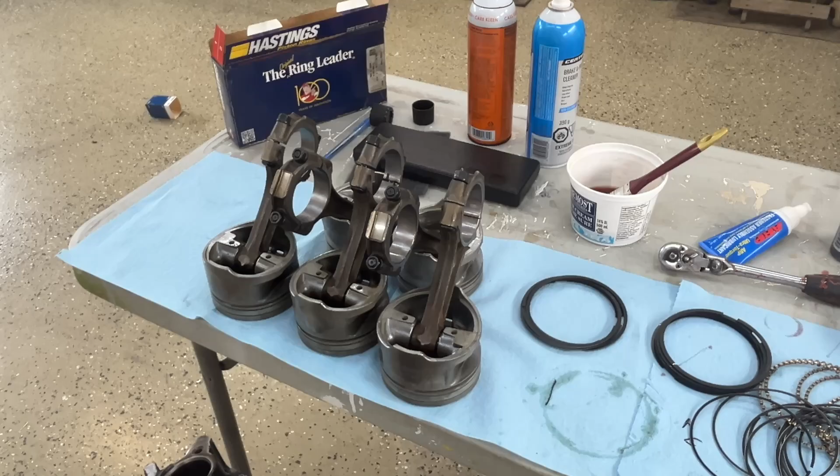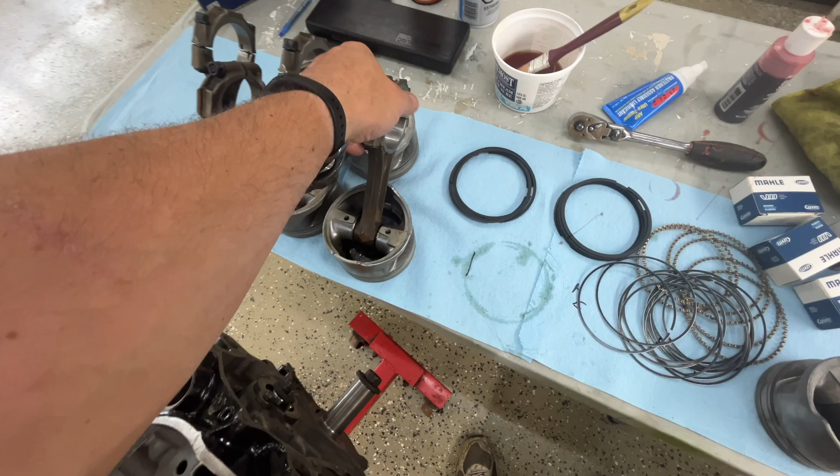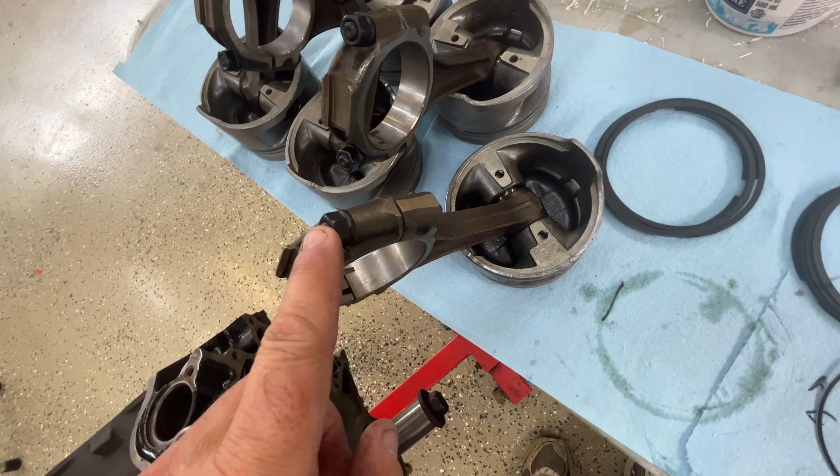So here's an update on what's happening with my engine assembly on my 5-liter Stalker project. So I have 2 pistons in. I have 1 and 5 already in. And just a little overview of what's happening. So these again are factory pistons that have been checked and cleaned up. We've got stock Ford rods, stock original Ford pistons. ARP rod bolts being added because these are a weak spot in 5-liter Fords.

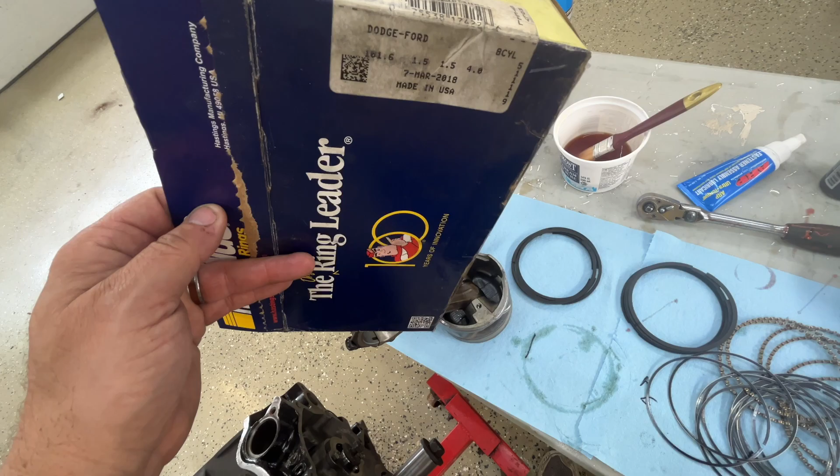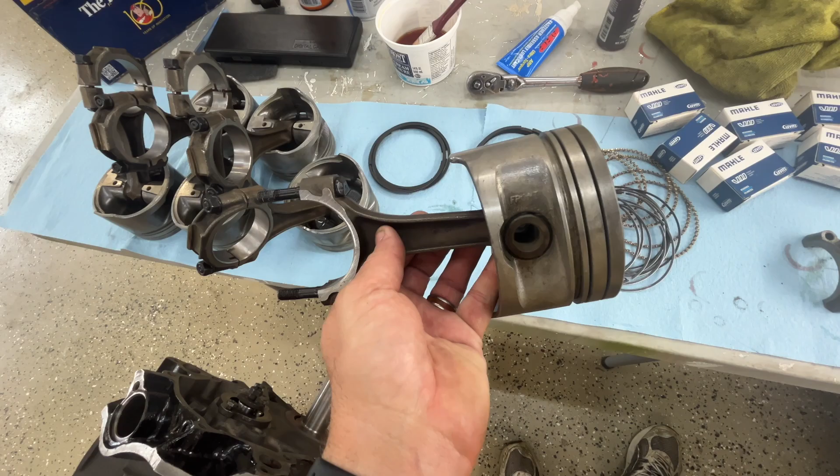My rings, upon recommendation from my machinist, are Hastings. These are a moly coated top ring, and they are standard tension for the 5 liters, which the roller motors are a lower tension to begin with. So I've got my top rings, my second rings, my oil control rings all set out. And then I'm just going through the process of slowly assembling this. There's a process, of course, you need to follow for all of this. There's lots of videos on YouTube and many books written about it.

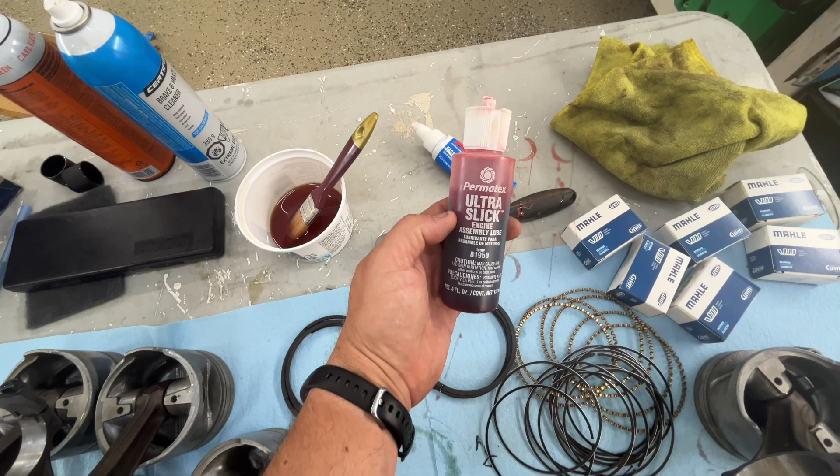With ARP rod bolts, you have to use their assembly lube. I'm using Ultra Slick for the bearings, Permatex. And this I'm using for cylinders and for lubricating the piston wall. People do different things. That's actually 30 weight oil, about a quarter Ultra Slick, and then I've got a tablespoon of Marvel Mystery Oil in there, which I use with kind of everything I do. I've had really good luck with it. So anyway, that's the process.

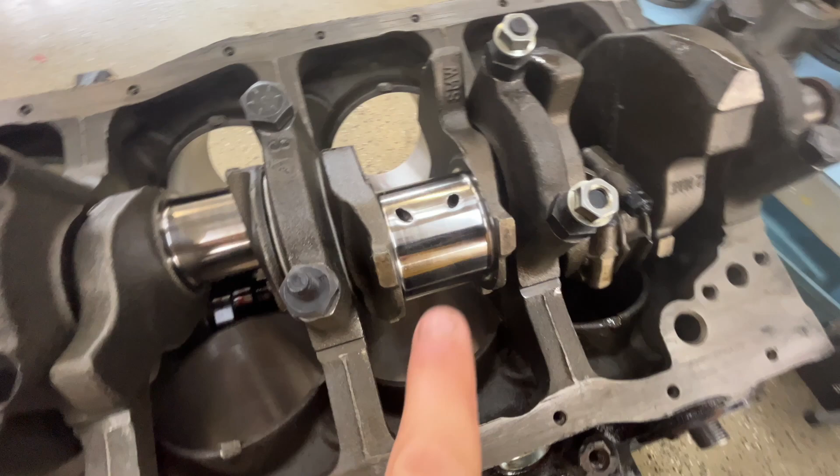So we'll get these installed, flip it over, give you a little look underneath here at the crank I put in yesterday. And a couple things to notice on it. You can notice that the oil holes are chamfered a little bit, just to allow a little increased amount of flow there. He did a beautiful job at the machine shop polishing this up. It's just butter smooth, and it just turns butter smooth. He did a little align bore, just touched it, and wow, did it ever make a great difference.

So put in the mains and put in the moly bearings. And everything's exactly in spec where it should be in terms of thrust. I think it was 5 thou, which should be 4 to 8. The main bearing clearances were perfect, right where they need to be. And I checked 3 rods, 1 here, 1 in the middle and the end, and they're all perfect, as he told me they'd be when he did his machine work, but always good to double check.

And yeah, so working on this process, and we'll get these installed. The cam's already inside there, you can see it. That was one of the first things I did. All lubed up, again, spins just beautifully in there. So there's a quick little update on what's happening with my Stalker project.

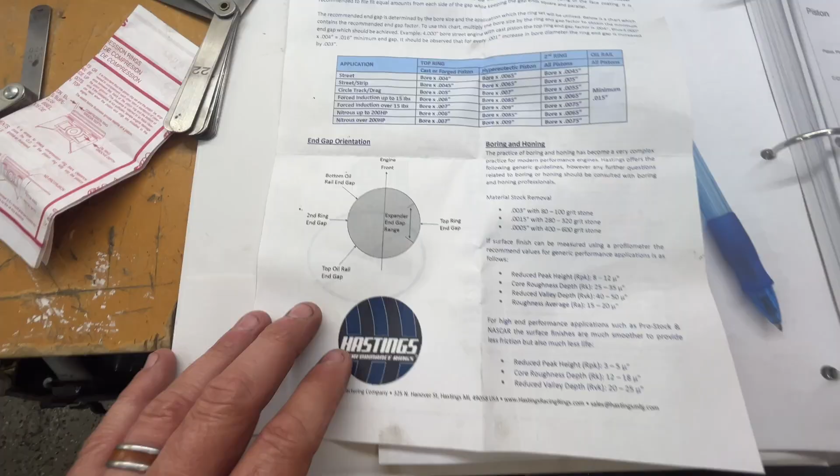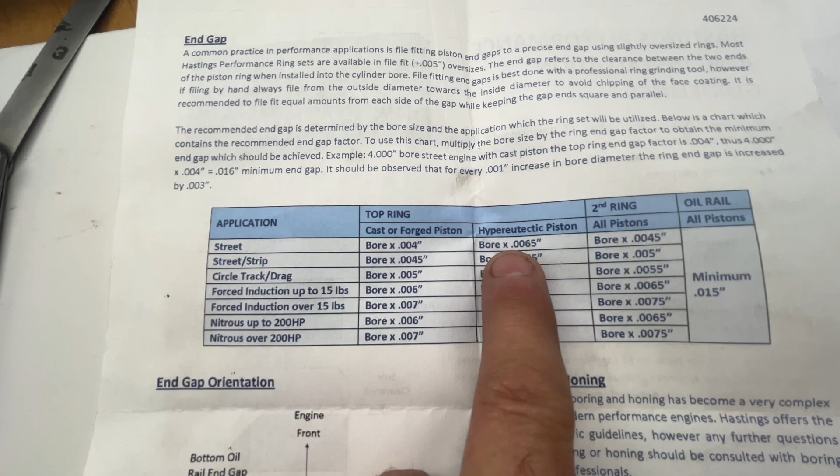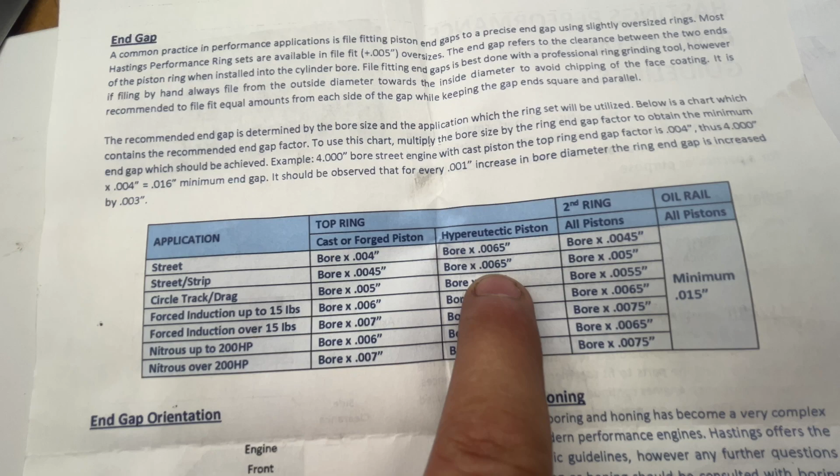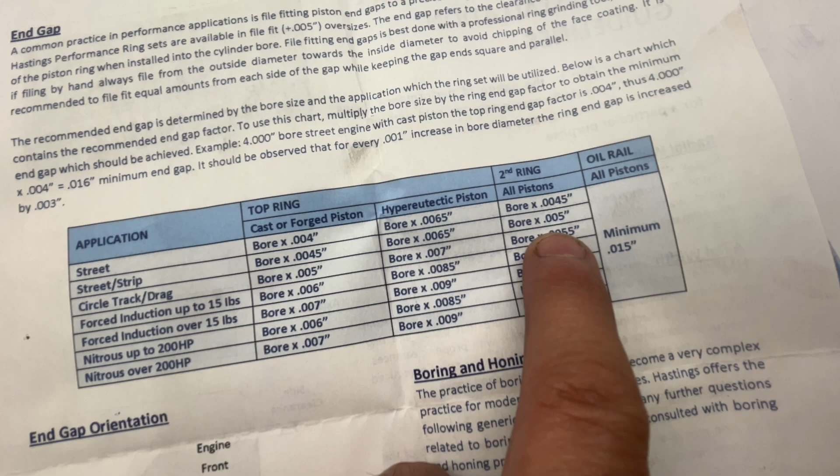Oh yeah, I was going to tell you about rings. So rings come with instructions, obviously. So the main ones here are your gaps, and we can see I have hypereutectic pistons. And for street strip it should be per inch of bore, so that would work out to be times that by 4, so 26 thou, and that's pretty much exactly what it is. When I measured up, I think the top one was 26, and 20 for the second ring, which is exactly where it's spec'd in. So fits just as it should.

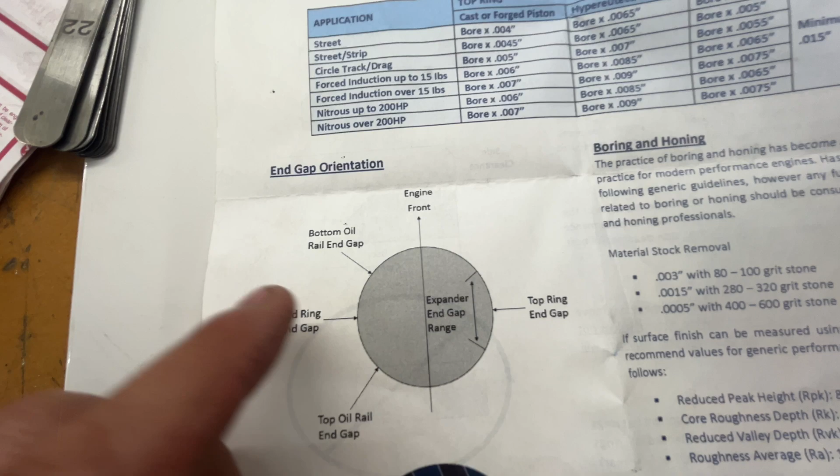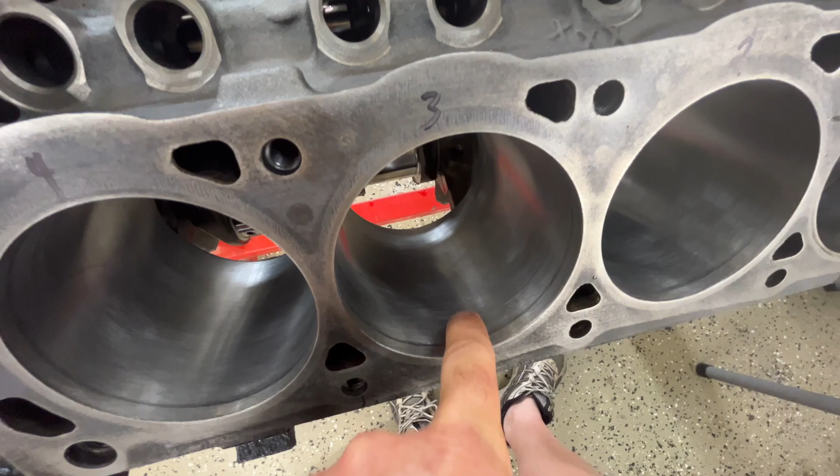And there's how you orient them, right? You got to orient your rings, stagger them in a certain way towards the front of the engine, of course, to make sure. And there's, of course, information about the honing. One thing I did notice about the machine shop is that the finish on the bores is very smooth, way smoother than I actually would have anticipated. And I guess that's just the way things are now, but you can't catch a fingernail. You barely can feel it. It feels like smooth metal, but there's a nice finish on there.

But that's the way it's to be. I think he finishes it with 400 or 600 stones, like very smooth stones. That's part of the ring preparation package. So yeah, there you go. Quick overview as we finish getting all of the pistons and rods installed.